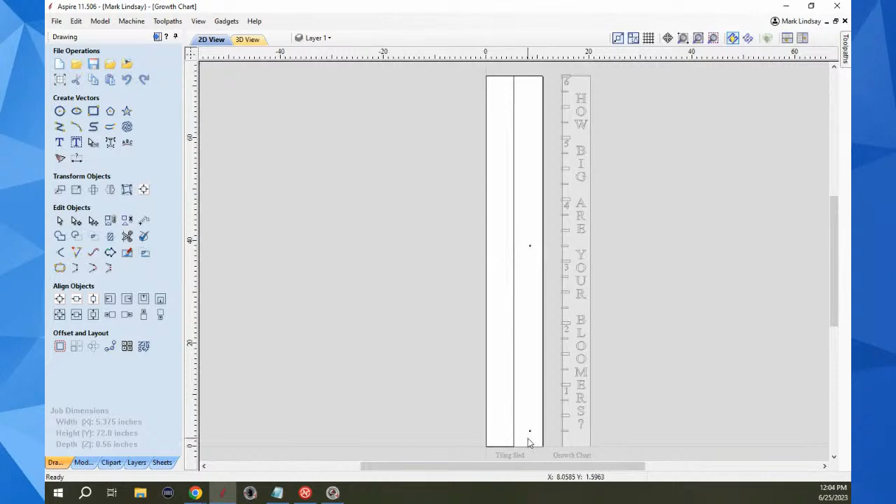The first question I'm going to get to came in from Steve over at Harneal Media, as a matter of fact, this morning in a comment. Let me go ahead and share my screen here real quick, we'll get over here into Aspire. He was asking specifically about the alignment pinholes over here in the sled that I'm building. He said, would it not make sense to have two alignment pins to keep the piece straight and not use that single pin as a pivot point? That's something I didn't think about mentioning in this video. I was going to point it out in the next video, but your point is well taken, Steve.

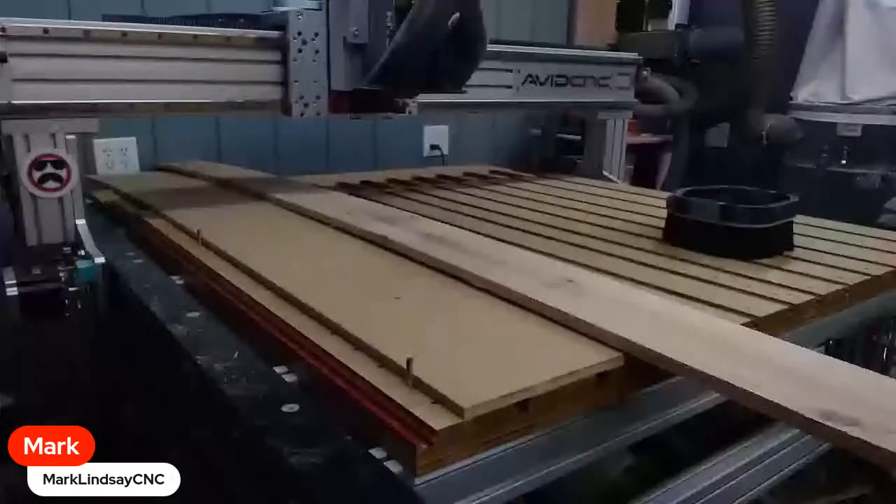So what I'm going to do is switch over to my other camera. Here is the sled I'm going to be using, and here is my piece of work material. My plan is to line up this sled along the bottom edge of my spoil board and shoved up against these two dowel pins that are ostensibly used for a work offset. I will not be using a work offset on this, I'll just be running the straight G54 offset. So this will be attached here, then when I get it cut down to size, my piece of work material will be attached to that sled, aligning on these pins as well. It'll be fastened down with, as I said before, either tape and CA glue or with double-sided tape. I'm not sure which yet.

When I drill that alignment pinhole, it's going to come over 3 inches up, about right here. This is where it's going to drill the alignment pinhole. And then the next one will be drilled further up.

Then I will run the first tile, which will do the bottom half here, take the screws out, slide it down this way so everything is aligned against these 2 pins. And then when the hole I bored up here aligns with this, I'll drop the pin in, fasten it all down, and then cut the second tile.

Speaking of the project, let me go back to the picture, because it was only after I was editing the closed caption for it that I realized I never mentioned what this project is. It's a growth chart.

As you can see, my wife and I are at that age where we don't have young kids. Our kids are grown and gone, they have kids, their kids are grown and gone. So we don't have any kids here for a growth chart. What I do have, however, is a wife who has flower beds and a garden, so this is a growth chart for her garden. It could either be mounted on the fence or leaned up against it and moved around, just so she can measure the height of her flowers. She's got some out there that are about 4, getting close to 5 feet tall as it is.

Hence the phrase, how big are your bloomers? I figured the right people will get it. She thought it was cute, so that's what we're going to do. It's a growth chart for her garden, an outdoor project, which is why I'm cutting it on a cedar fence board. So that's what the project is, and I forgot to mention that in the video. So I'm sure some of you were scratching your head going, what the heck is he doing?

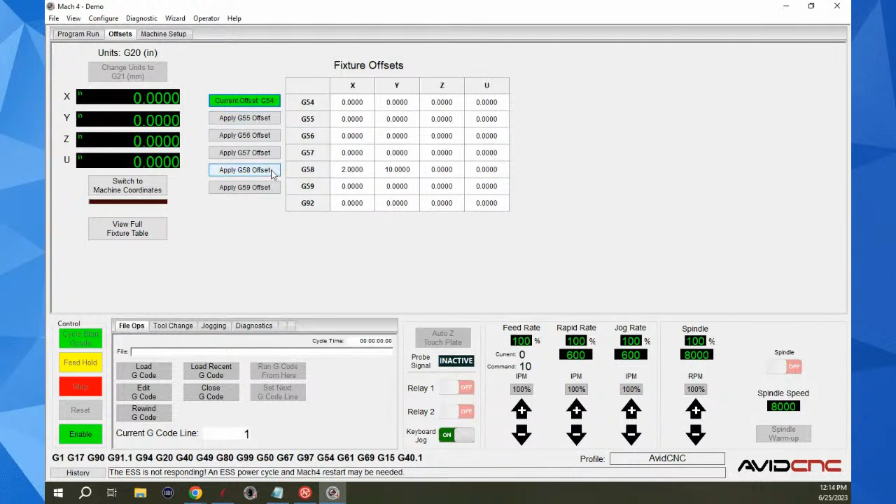So, you know, what can I say? It's just going to be a case of take copious notes. Think of it this way: you have a CNC router, you could make yourself a little sign chart and put it next to your monitor so that you could look, okay, I want to go into G57, and then click over to your offsets and go G57. So, what can I say? I don't think that's possible.

Let's get back over into some more questions. All right, Michael McCrite says, using VCarve Desktop limited to 24 inches. I have 4-foot wide X on the Gatton CNC. How would you suggest tiling without moving the material? Maybe by resetting the X0. That would be a mistake to do it that way, to reset the X0.

That's something I'm going to go into in the next video. Once you set your XY0, you do not touch it. You don't change it. Even after you've moved your material, the software has already taken all that into consideration. So if you reset your XY0, it's going to throw everything off by however big your tile is. Once you set your XY0 as you're cutting your first tile, it doesn't change.

They, let me get up. In fact, I did a video on it in reference to 3D carving. Let me go back over here, share screen, and boom. Over here in the Toolpath tab, I've got all my toolpaths, got them selected.

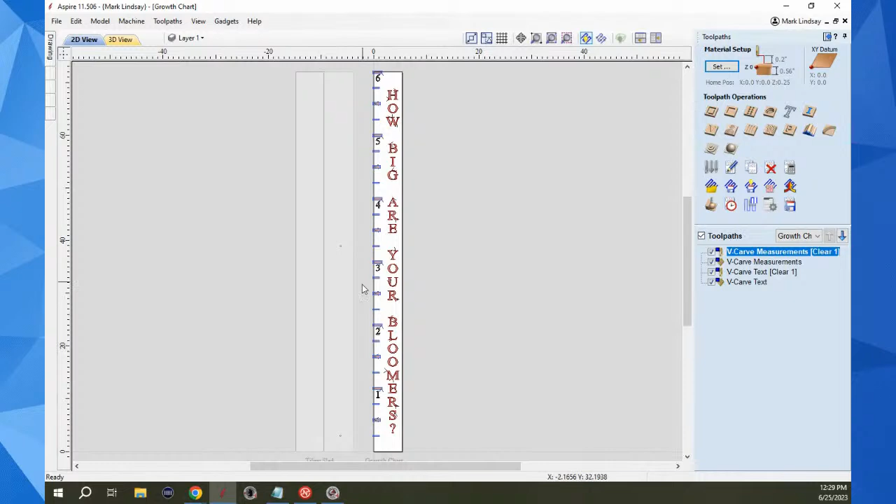Then I can come up here and find it, array copy the toolpath. So for instance, I could set up 4 or 5 fence boards on my CNC table. Then by array copying the toolpaths, I can tell it how many rows in Y, which would be 1 row in Y, and let's say I have 5 pieces of material. I would either set an offset or set a gap, and then array copy those toolpaths so it would do multiple copies of the same thing.

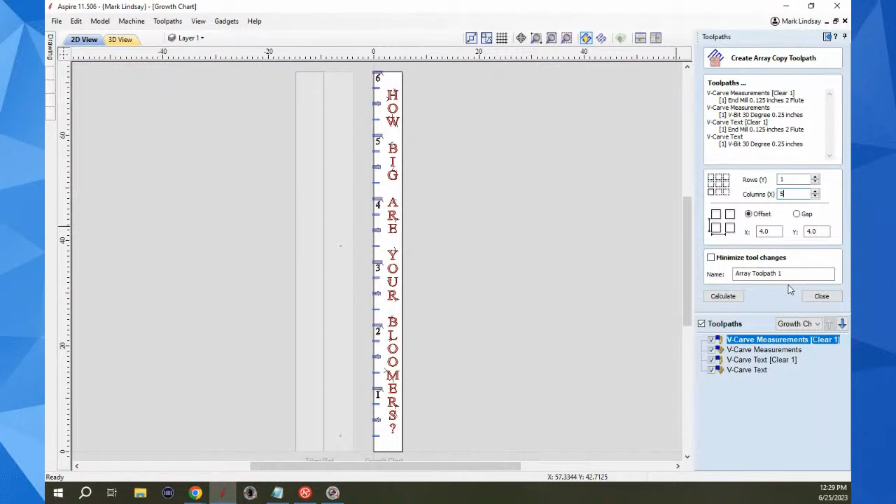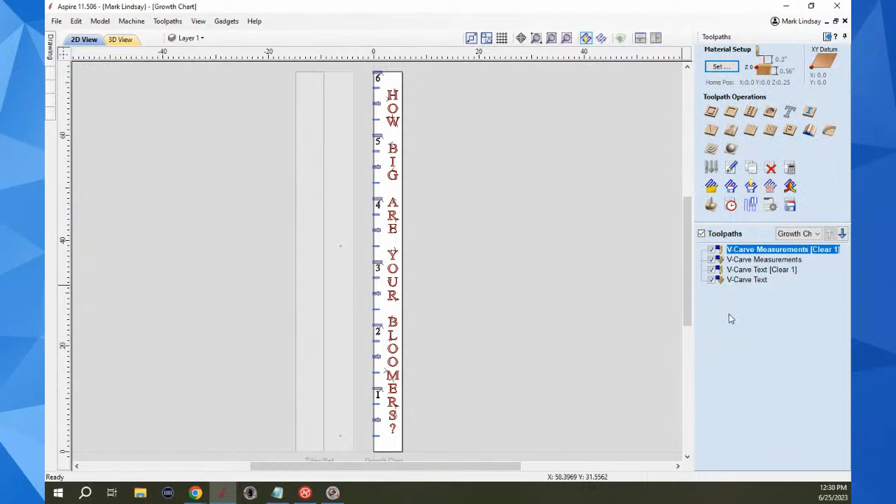I did do a video on this, it was for a 3D carve, where I did the array copy, array toolpaths, and I will post a link to it as soon as we're finished here. But you can do that in VCarve and Aspire. Okay, close. And also there are macros for Mach 3 and Mach 4 that will do the same thing.

If you draw one design and want to create several copies of that on one large piece of stock, there are macros within the controller software that will do it as well. So let's see here.

Extreme Workers says, I've always wondered if it was possible to specify what fixture offset to use in VCarve Pro. Not within VCarve Pro. You would have to open up your G-code file, and most G-code files will open in Notepad or Notepad++. Notepad++ has a lot more options and it's a little bit better program, but all Windows computers come with Notepad, and most G-code files will open in Notepad.

And you could go up to the top of that G-code, and within the comments there, you could enter what fixture offset to use. Anything in parentheses, at least for Mach 4, I can't speak to any other controller software, but anything in parentheses is a comment, and the controller is going to ignore that. It's not going to read that as a command. So you could create your own line in parentheses, say, use G57 fixture offset, and it would be right there in your G-code.

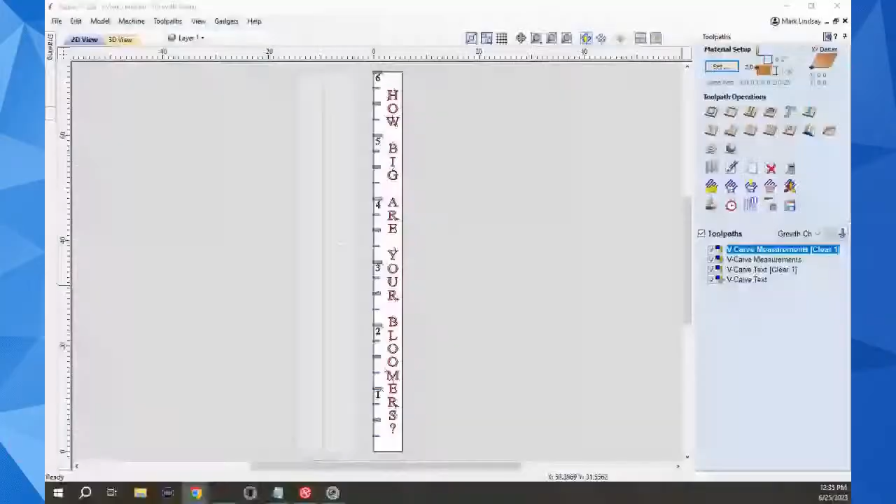Ray Dixon says the offset he was talking about was in tile 1, the other day when we went through where the top of tile 1 met tile 2—there was an offset. Okay, actually it's an overlap. And this is where we're getting into—I know it sounds like we're talking semantics here, but I am that guy. I'm a word nerd, and words mean things.

So let's go into the tile toolpaths, bring in my manager here. And we have here—I cannot make this bigger—that is a tile overlap.

I have mine set for a quarter of an inch. I believe this is the offset you're talking about—it's an overlap. That's why I didn't know what offset you were talking about.

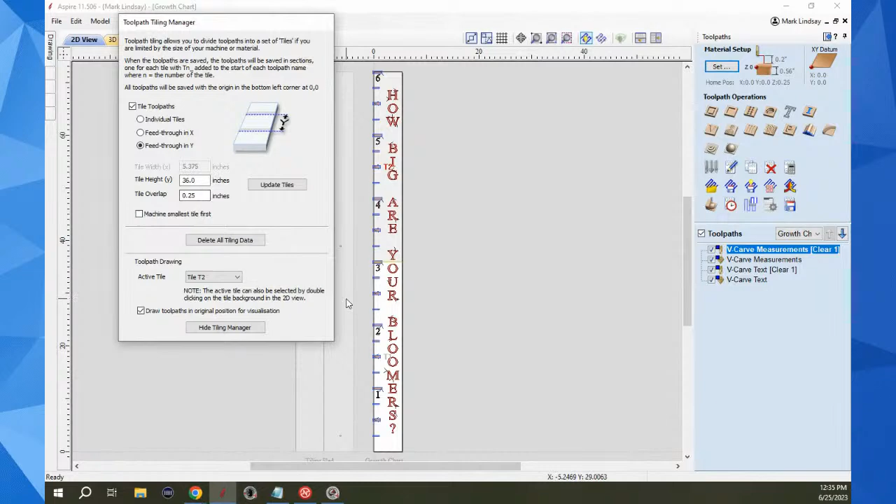The reason for this overlap, let me show you: I have this rectangle that I want to V-carve out that sits right on this dividing line. So if I don't overlap, this V-bit's going to come up and make my square corner like it's supposed to, then it's going to come to right here and stop.

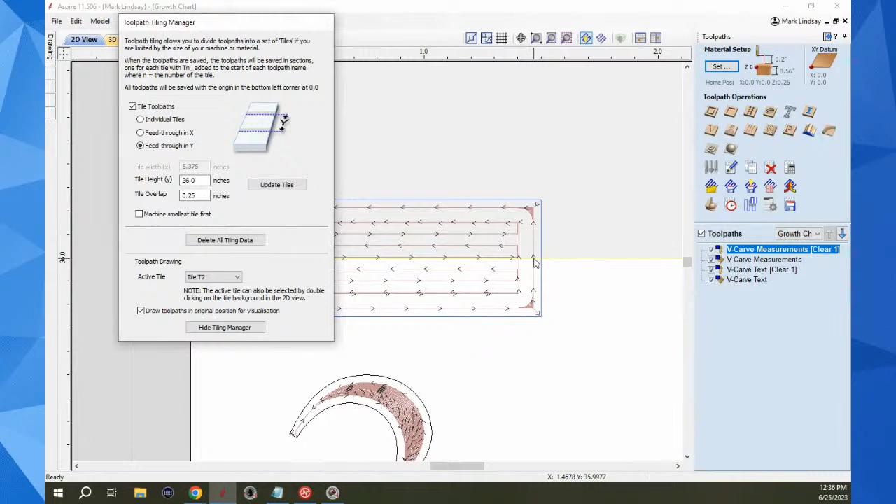That's going to leave a radius right here where that V-bit stopped. Then when the tile up here cuts, that bit's going to come over and stop right here where it's supposed to, then go up this way. So that leaves a radius up here and a radius down here that I'd have to go in and clean up with a chisel, because it won't be carved.

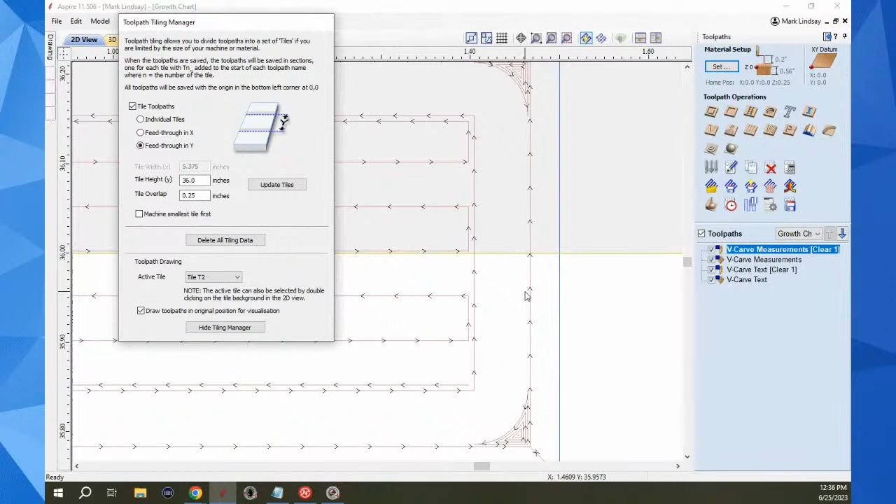So by setting an overlap—I have it here at a quarter of an inch—update tiles, boom. By setting this overlap, when it's cutting this part down here, it's also going to cut past the distance of this overlap and cut this entire thing out. That's the reason I did the overlap, so it would cut this out completely as part of tile 1. Does that make sense, Ray?

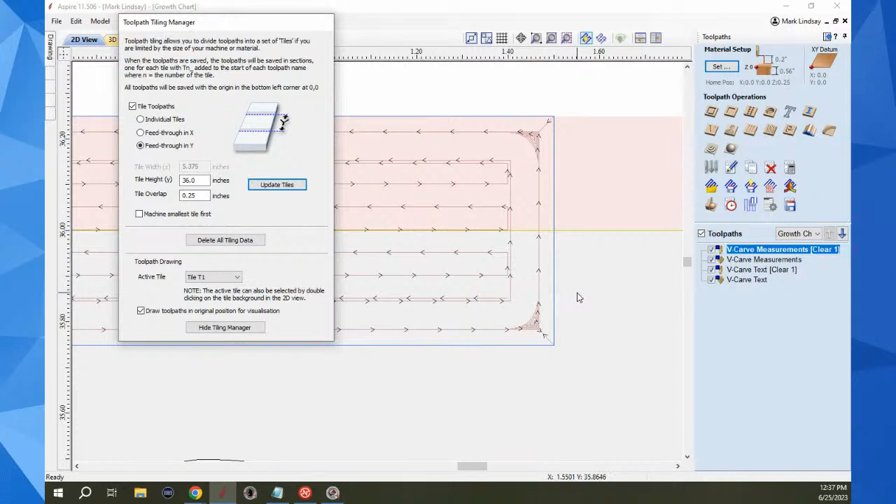Now, in fact, what I should do is go a little bit further than that—let's go three eighths of an inch, 375, and update the tiles so that now I'm sure it's going to come all the way up here and give me a square corner.

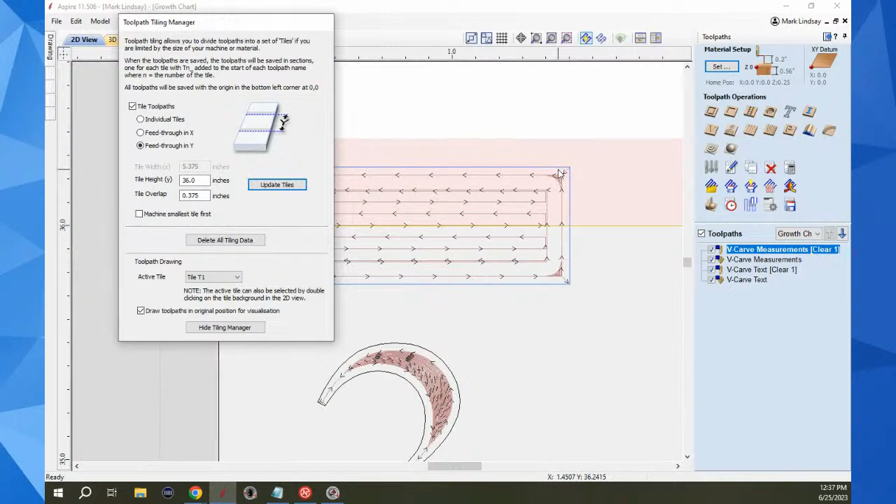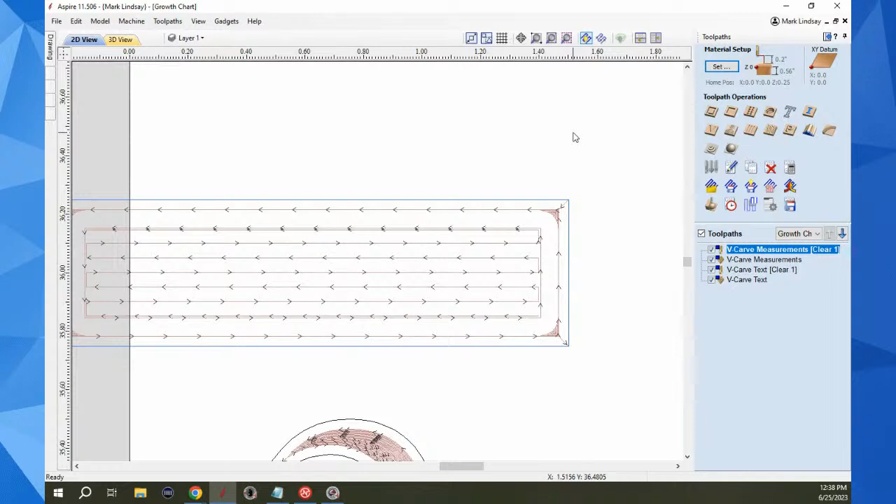Okay, let me undo and hide the manager. Again, if I don't have it overlap beyond this area, when it goes to V-carve out this rectangle, it's going to come up to my dividing line and stop, then head back this way. That's going to leave uncut regions out here. I want it to go beyond this and then go ahead and carve out the entire thing.

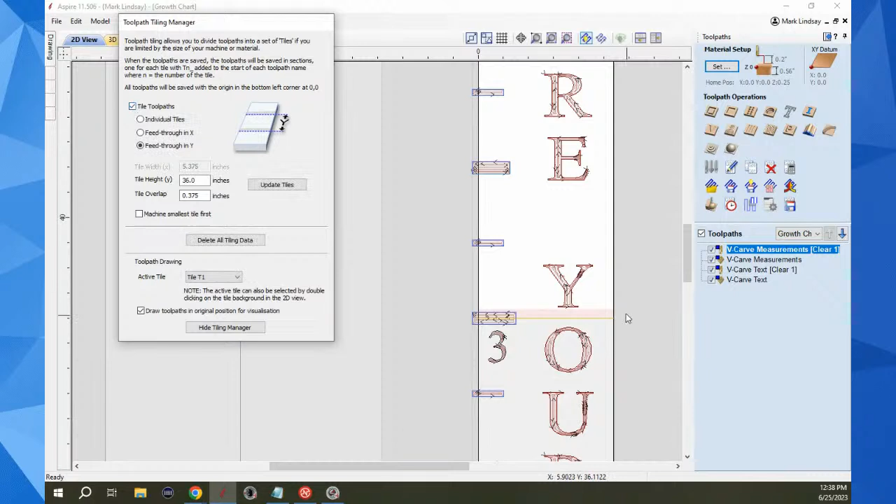Now, if you happen to be lucky enough that you don't have anything right there on that tiling dividing line, let me bring that back. Whoops, wrong one. Close. Come on, Mark, know your icons. If you don't happen to have anything down here, then you don't need it.

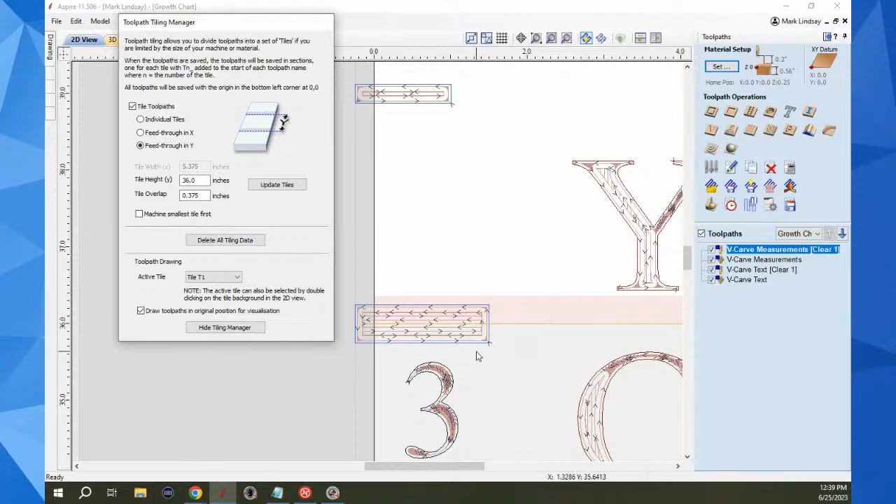And in fact, if you're confident... I would just use it if you have anything down here that's going to be cut. This is especially true when you're talking about 3D, because let's say I had a dish going here, I don't want a dividing line going across that dish that I'm going to have to go in and try to clean up. So that's the reason for the overlap there. So let me uncheck that.

Let's get to another question. Dwayne says, so your overlap needs to be the radius of the bit you're using at a minimum.

For the most part, yes. Personally, I would take it a little bit further than that, just to make sure that you don't leave a radius or any cusping there, especially if you're using a ball nose. Because if that ball nose, the center of that bit gets right up there on that line, even if you have an overlap—let's say you have a 1/8 inch ball nose and you put in a 1/8 inch overlap—it'll probably leave a little cusp there where it didn't cut. So I would go beyond a little bit more than that.

So, let's see here now. Teaspoon 20, throw it in a couple times. I was getting to it, man, I promise. Can you recommend a graphics tablet for Aspire?

Basically just for sculpting, I can't recommend one because I've never used a graphics tablet. I don't have room on my desk to put one, and that's the only reason. I have heard a lot of people have had very good luck with a Wacom tablet, but I couldn't recommend which model simply because I don't know. I've never used one. But I think folks have more or less accepted that the Wacom tablet is pretty much the standard, and they're not super expensive.

Chip Frappier has a good question. Let me share Aspire. He asks, wouldn't you need an overlap at the top to make sure it gets the 6 foot mark without leaving radius marks? No, because if you look, I have drawn these rectangles specifically for this.

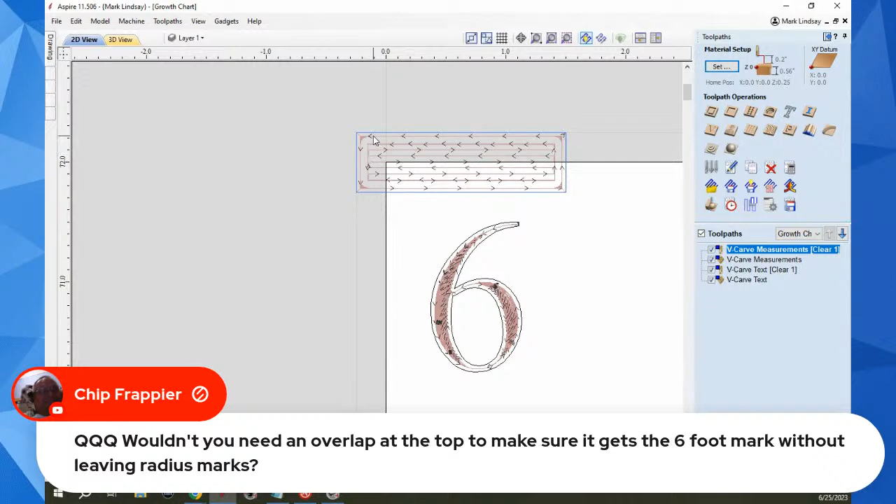Let me turn on the toolpaths. I have drawn these rectangles so that they go off of the material, off the edges, so I will have a clean carve here. I won't have a radius on the outside, and I won't have a radius up above. If you look at all of the rectangles, they all go off the material. Up here at 6 foot, this is basically half a mark, but I don't need to add that.

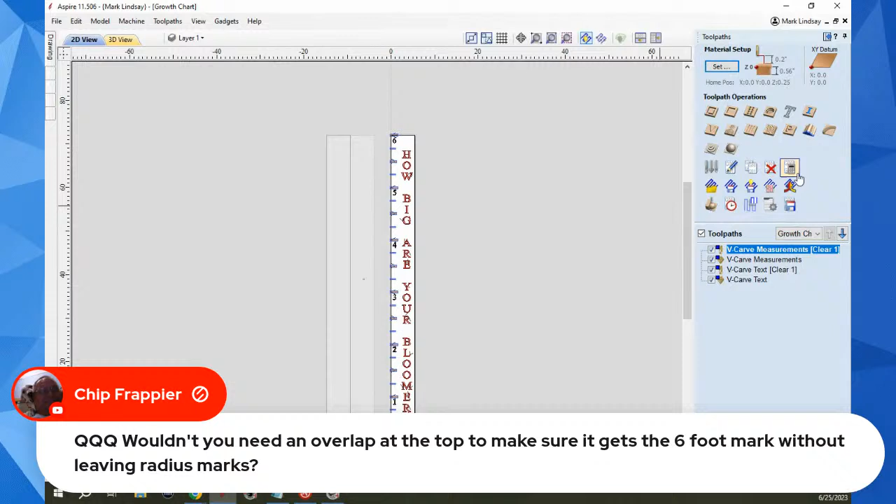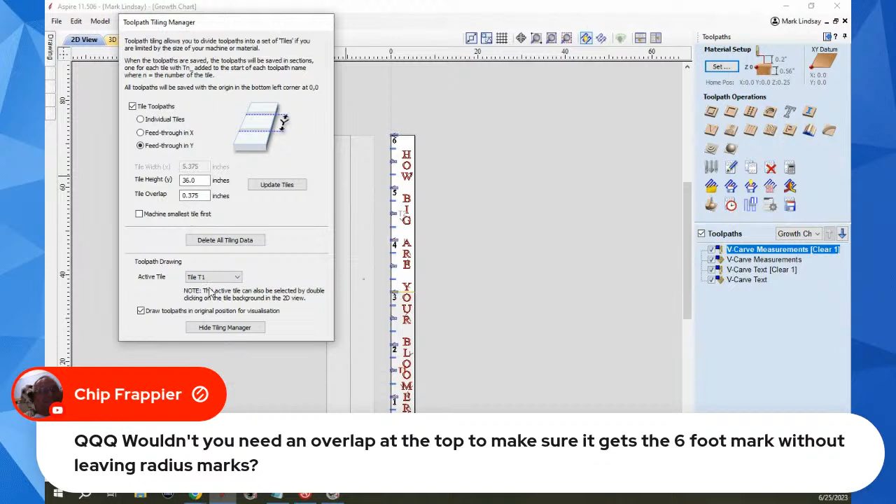Let's get into tiling, turn the toolpath on, and look at tile 2, the active tile. We can see up here that it's going to go ahead and carve off of the entire thing. So I can hide that, uncheck this, and get back over here.

Sargon says screen 1 is good if you are away from your computer. Teaspoon 20 is using the 11.5. Machined in Wood recommends the Intuos Pro. Martin Pearson says just for sculpting, a screen is probably not needed, but once you have a tablet, you will want to use it for more, and a screen will help when you're using the freehand tool to trace.

A.L. Peleg says he doesn't think there's an issue of it not working on any model. It's just an input device. Different models have different resolution, sizes, sensitivity, extra buttons, and so on, but all work. Thanks, that's good to know.

Someone mentioned using the Intuos Pro, but with the freehand tool it has changed, so that's where I got that from. Check to make sure it works with your version.

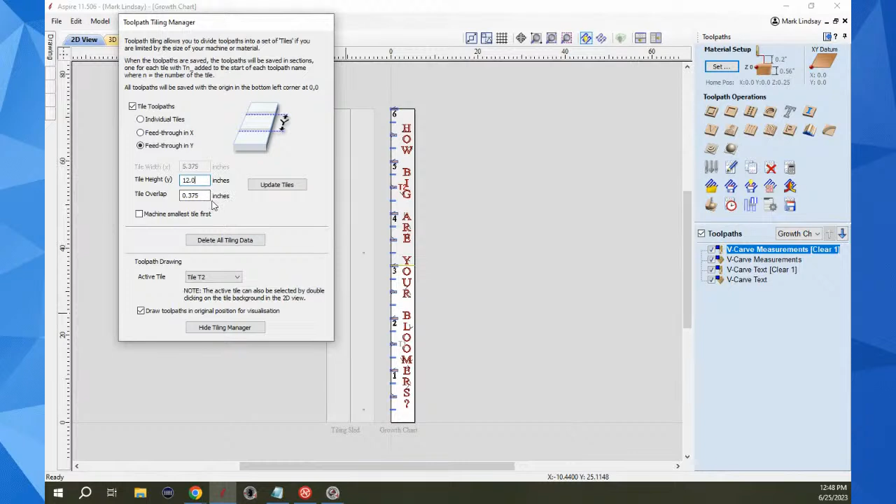Let's go back into tiling, tile toolpaths. I have a 6 foot long project. I can set my tiles to be 12 inches tall and leave everything else alone. Then click update tiles, and now it has made 6 tiles.

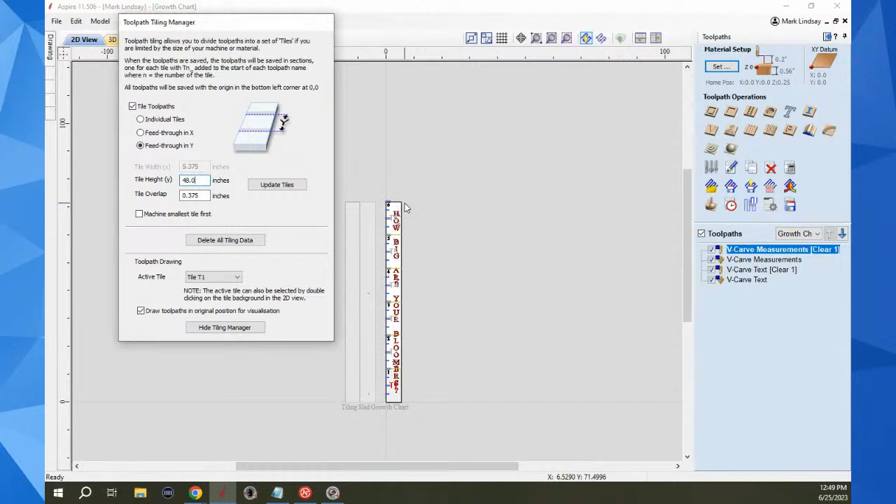So if I want to move the material 6 times, I can do it. Or let's make it uneven. Let's say I want a 48-inch tile. Again, my piece is 72 inches. If I update this, I now have a 48-inch tall tile and a 24-inch tall tile. So it doesn't have to be an even number, and you can split it up however you'd like.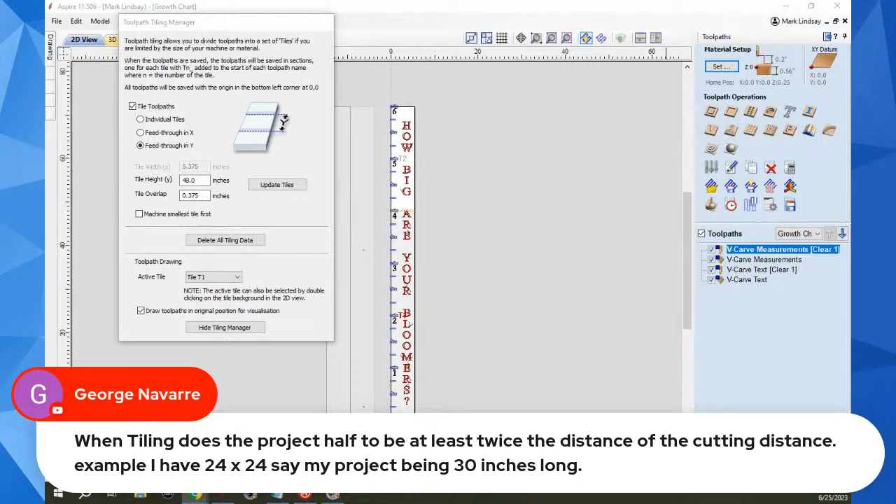It doesn't even have to be the same piece of material. You could set it up to where you have 3 separate pieces of material, cut tile 1 on one piece, tile 2 on another, tile 3 on another, then assemble them after they're cut. So no, when tiling, the project does not have to be at least twice the distance of the cutting distance at all.

Okay, let's go back over here. Hey, it worked. So let's see here.

Brooks says personally he had a hard time with the tablet, felt like he had to learn to write his ABCs all over. Yeah, I'd imagine it gets a little different. My wife used to be a fan of them too, but I don't like the ones currently on the market. I used to use a trackball with my thumb instead of a mouse because of limited space on my desktop. It just sat in one place and I could move around with it. Well, I've since gotten used to using a mouse again, and now when I sit down at my wife's computer, the first thing I try to do is move her trackball around.

And of course, it doesn't do anything. So it's like, yeah, you have to figure out where you're going with this thing again. I would imagine that would be the same thing for somebody else to go to the UK and drive. You're used to driving on the right side of the road, and now you have to drive on the left.

A.L. Peleg says, can you see those cusps in the preview if there is no overlap? You know what? I don't know. Let's see. Let me go back to the full screen. And all right, we've got this.

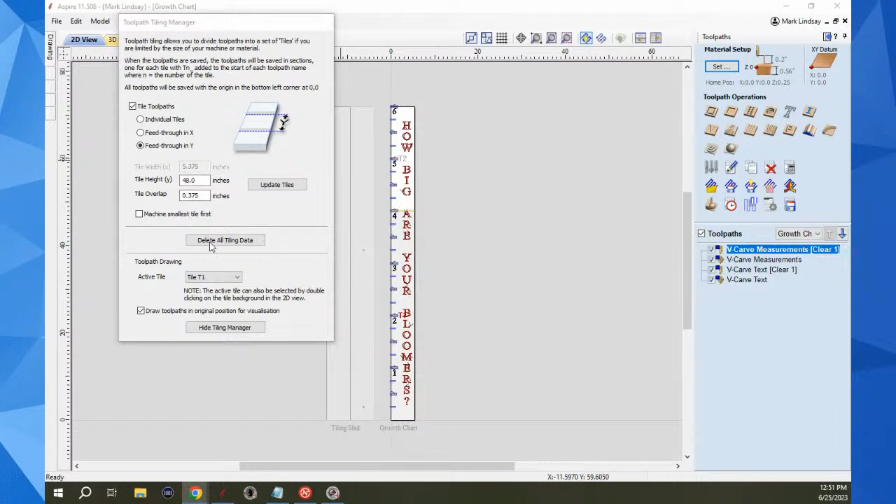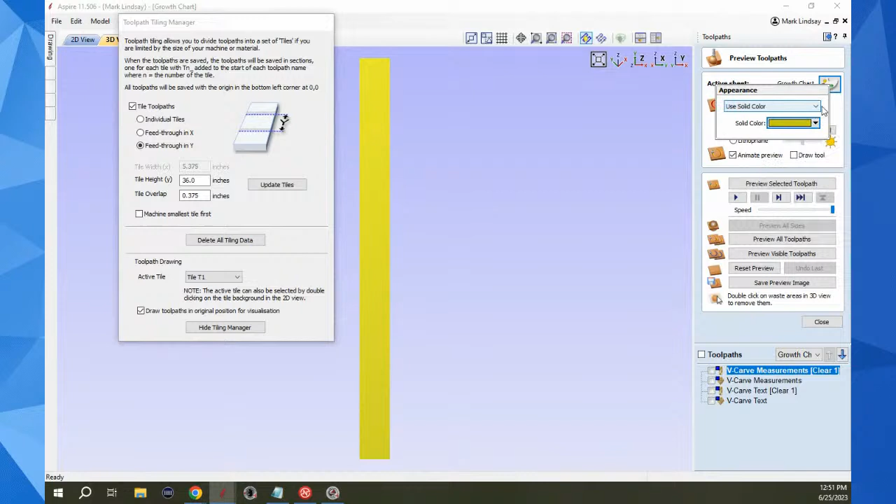Let's go back to 36 just to make everything okay. Update tiles, we got that. Now let's jump over to the 3D view. Let's set this to, no, don't want to use solid color, I want to use medium wood. There we go. Preview all tool. Tile 1 is the active tile. Let's get rid of the tile overlap. 0.0. Update tiles.

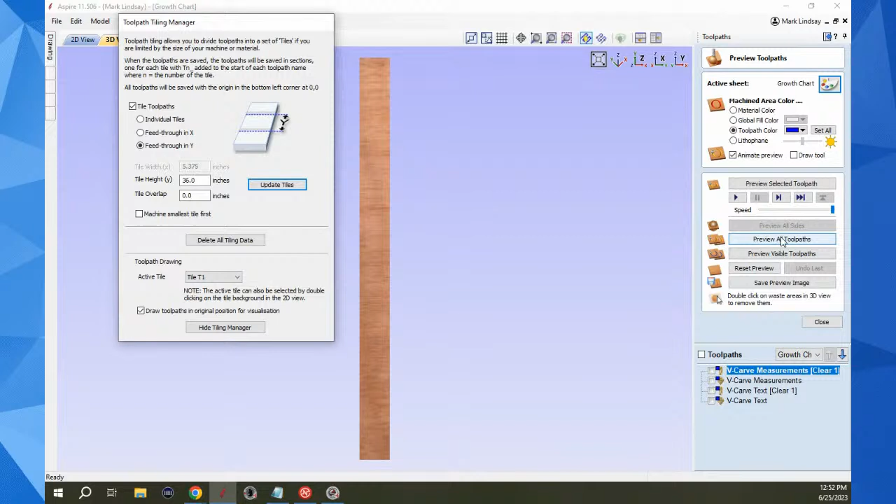Let's preview all toolpaths. Okay, let's go up here and let's take a look. Well, it did go by a little bit there. Okay, that's where that cusp would be.

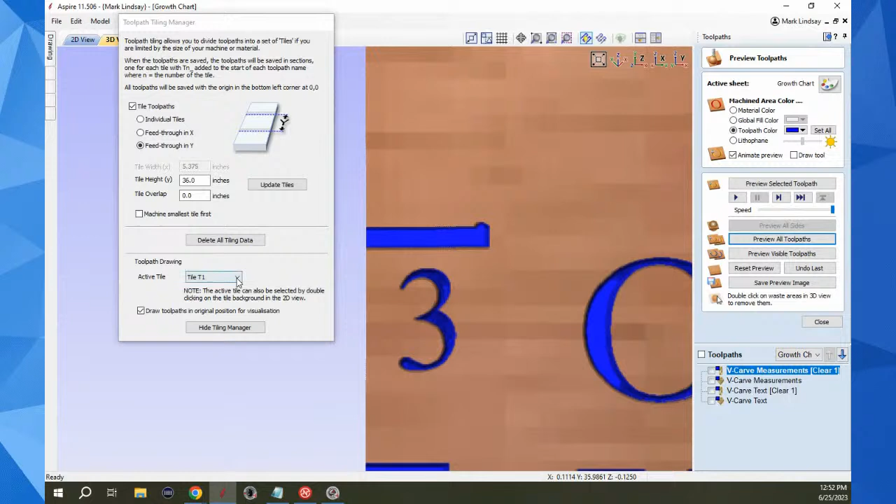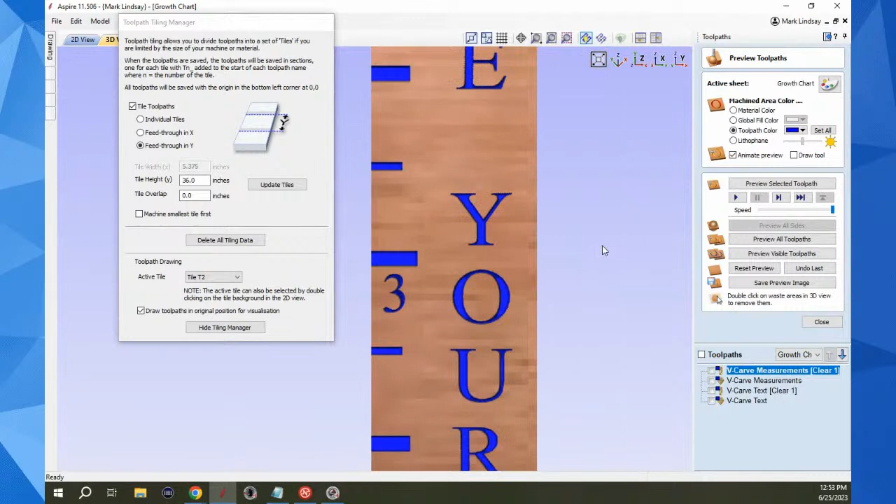Let's switch over to tile 2 and preview all toolpaths. Well, what do you know? AL, it did remove the radius there where those would have met. I'm shocked, I may write home. That is something to write home about. Okay, good to know, so it did go beyond.

Let's reset the preview, go into tile 1, and preview all toolpaths. The toolpath did make it go beyond just a little bit to avoid having that radius there. So it looks like that overlap is not required. Okay, I stand corrected, it's good to know. Thank you for asking that question.

So let's see here. Let's see here.

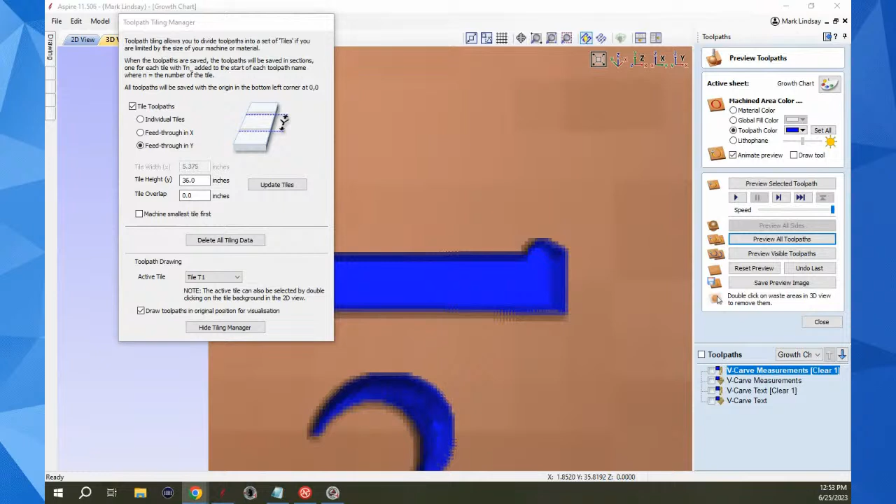Teaspoon 20 says, I just cut a sign using tiling. If the vectors go in the minus direction from your start origin, it won't cut like you want to. Yeah, yeah, that's what I gather. Again, I've not tried to go minus direction, so I don't know.

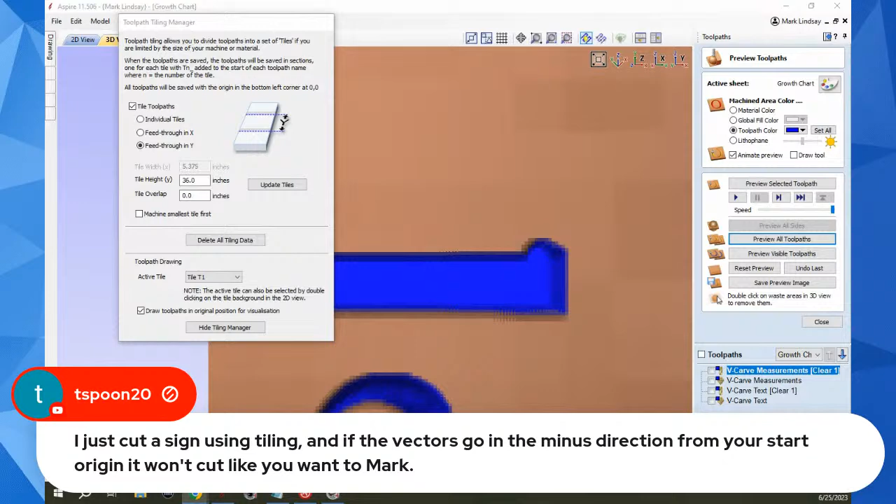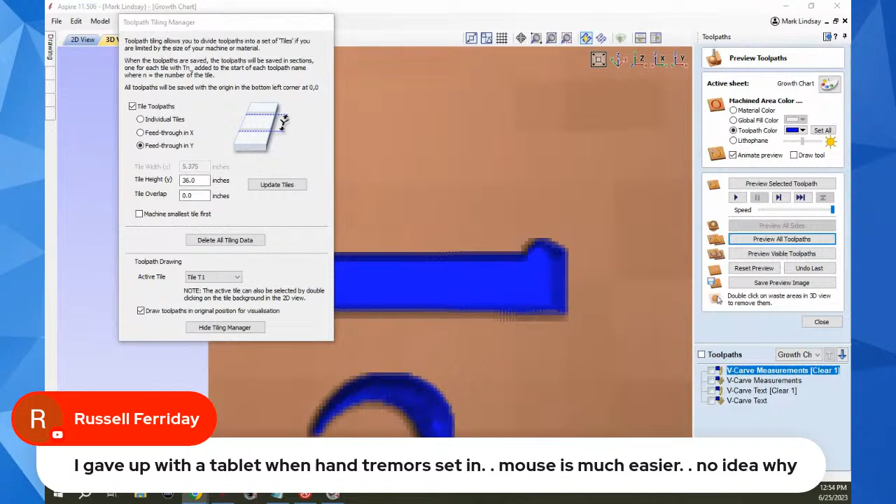Russell Ferriday says, I gave up with a tablet when hand tremors set in, mouse is much easier, no idea why. I do - with a mouse, you've got wrist support. Whereas with a tablet, you've got the pencil or the stylus, rather. I'm sitting here holding my hands like you guys can see them. With a stylus, you're just basically, if you can, holding a pencil. So yeah, that makes perfect sense.

Powell Patterson says, do you have a newbie's video I might learn to trace the profile of an image of a wooden molding to cut a plastic template of the profile from which to grind my molding knives from? I don't, but Michael Mazalik does on his YouTube channel, where he talks about cutting a parametric design. That's what you want to check out, is his example of carving a parametric design.

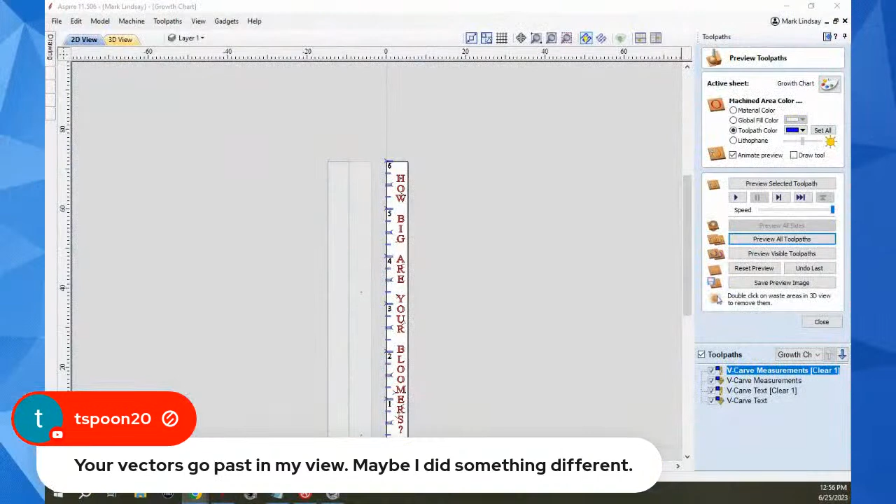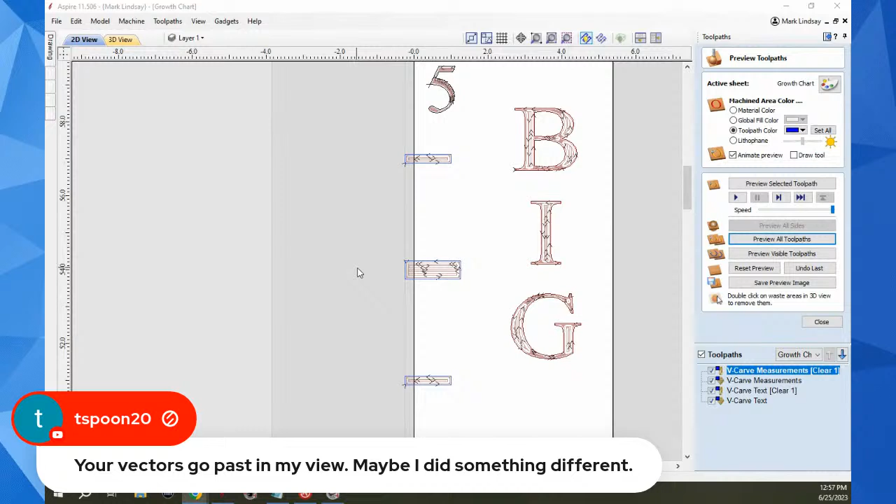Do you mean, let me hide the tiling manager in the 2D view. Boom, and let's bring this back. Do you mean here where they go off of, away from X0, Y0, or they go beyond my X0? It's showing the toolpath cutting, so I have no reason to doubt that it would do it.

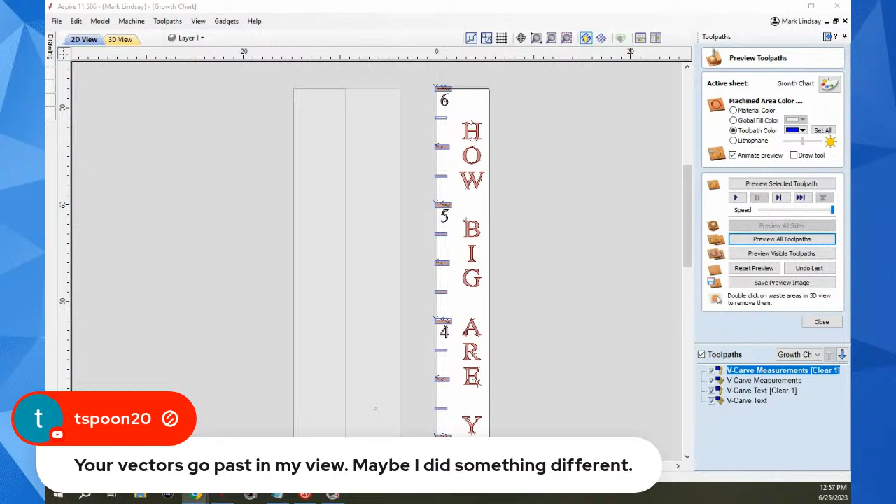I would guess the offset is required or helpful for ensuring a cleaner cut. Again, it's an overlap, not an offset. It's an overlap. Okay, we got time for just one more here real quick.

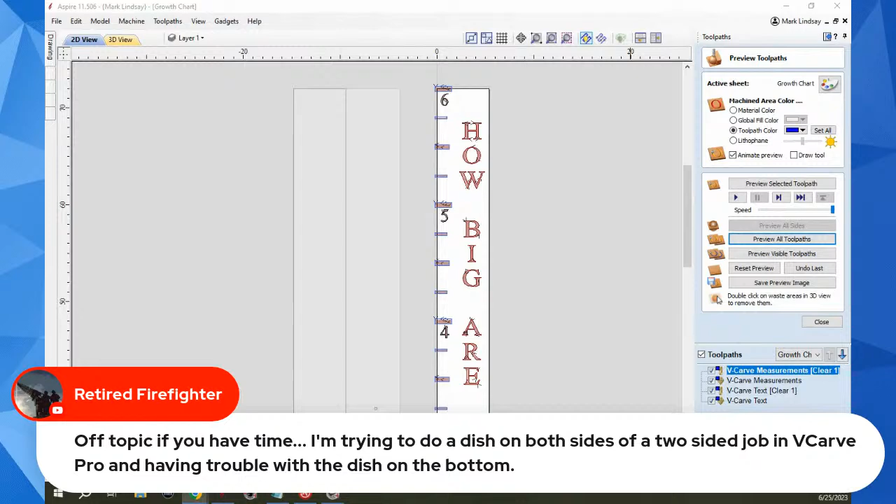Retired firefighter asks, off topic if you have time: I'm trying to do a dish on both sides of a two-sided job in VCarve Pro and having trouble with the dish on the bottom. These dishes are on opposite ends of the material. Setting a zero plane for the dish on the top side works, but it seems as though the dish on the bottom is referencing off of the top plane.

Oh, boy. I'm going to have to dig into that and probably put this in unfinished business, simply because I think you're right that the zero plane will only work on one side. And when you flip it over, it's going to reference the other side. I believe you're 100% correct there.

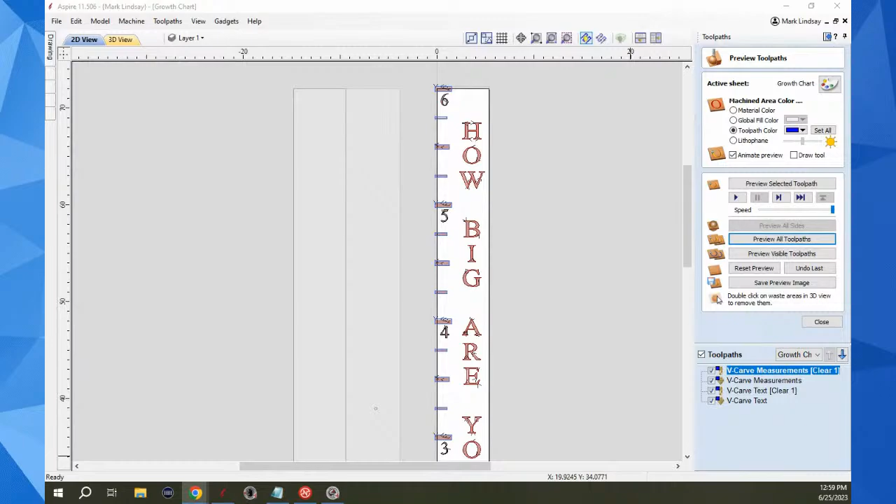I will talk to a couple of people and confirm that, or see if there's a workaround for it. And again, I'm still sharing here, I apologize. I'm going to check with a couple of people who are much better 3D modelers than I and see if there's a way of going about doing that, because I was under the impression you could have a zero plane on both sides. But now that you mention it, that might be the case. Let me get a hold of a couple of people and I'll try to have you an answer by next week, if that's okay.

Because I've not had occasion to need that yet, but it is a very good question. Two-sided zero plane. I will research that and then get back to you. Okay, and we'll talk about it next week. I'll put that in the unfinished business category.

So okay, if there are no more questions that I could answer in the next minute or two. Yeah, that's what he's saying: I've set zero plane on both sides, no dice, must be missing something. Yeah, I was under the impression that you could put a zero plane on both sides. I may be the one that's mistaken in that. So let me check with a few people and we'll make it unfinished business next week.